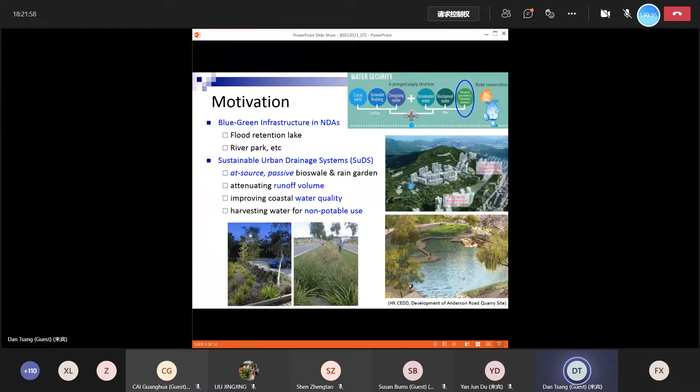At the same time, we would like to see whether we can improve the water quality. Water quality is also associated with the sustainable development goals, as Professor House explained earlier, one of the SDGs being to enhance water quality and the living environment for biodiversity. So our surface water can be partially treated before it goes to the receiving water bodies.

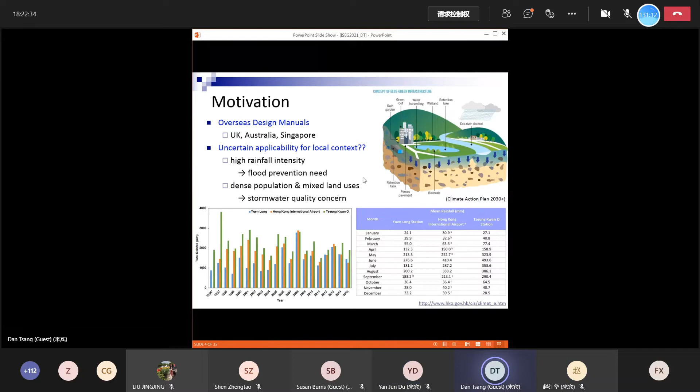So let me move forward quicker. We have some other design manuals from the UK, Australia, and Singapore, for example, and we make good use of those.

Let's go to the field scale studies we worked on with the government. For this, we're working with the DSD. In the previous project, for the new town development, we worked with CEDD, the Civil Engineering and Development Department. Then for SUDS, we're working with the Drainage Services Department, DSD.

This is in Kwun Tong, where they're dealing with the river, which is an open water channel for drainage. We would like to turn it into a river park. Then, for enhancing the water quality in the upstream part, we are going to install a filter system.

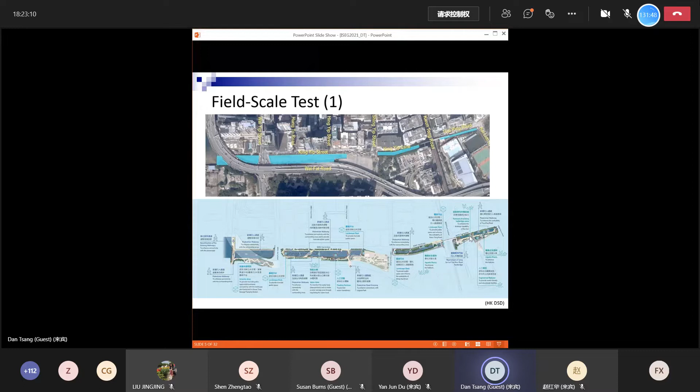Before installing the filter system, we conducted monitoring activities over a year to assess the water quality. We found that there will be some exceedance in terms of the dry season, or sometimes wet season, regarding suspended solids and so on. The red lines represent the discharge limit.

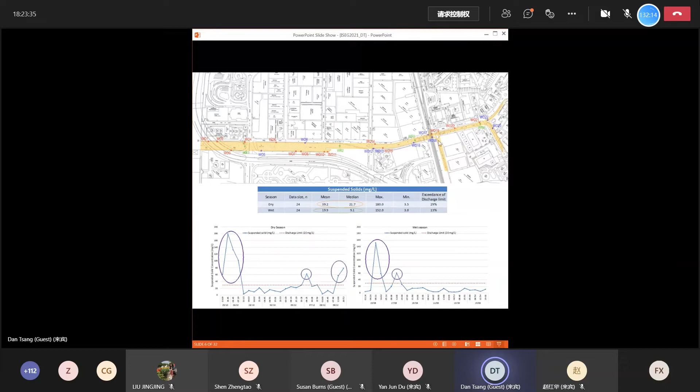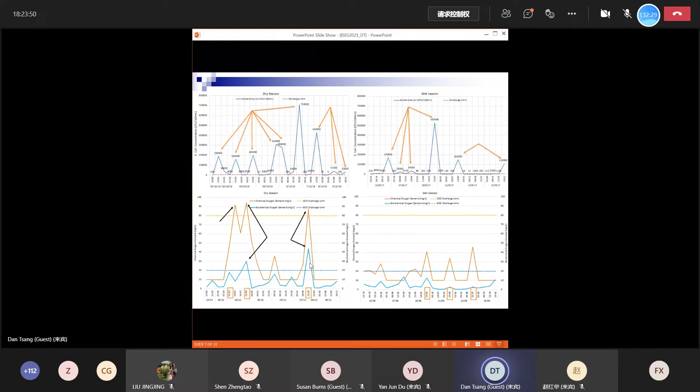Some of the days actually show exceedance in different locations along the river. In some days, especially in the dry season, you can see there will be even more exceedance in terms of E. coli, COD, and BOD, and they appear together. So the exceedances associated with water quality are more severe in the dry season compared to the wet season.

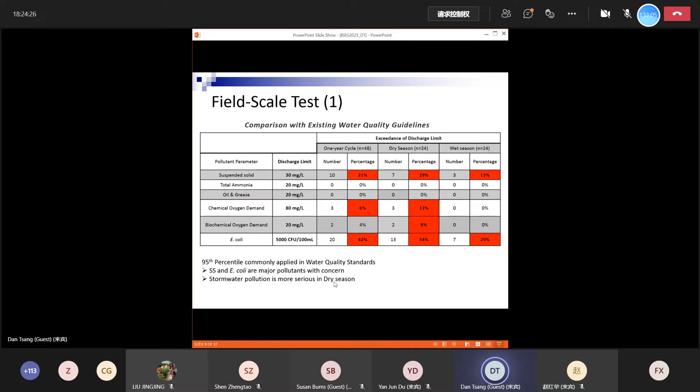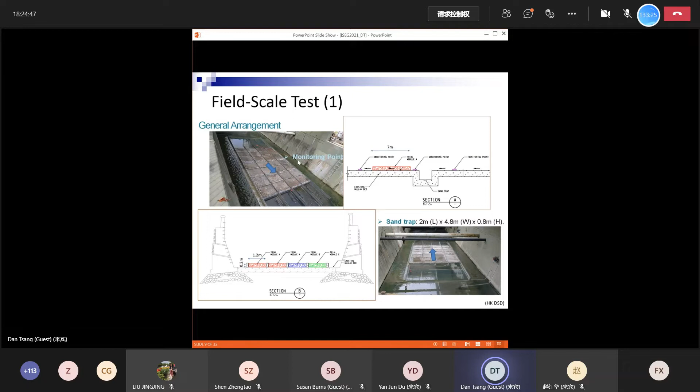Mainly, the more serious exceedances happen in the dry season. So we are dealing with the field scale test and design of the filter system, where we would install in-stream filters with different sizes of gravel, rocks, and sand to evaluate the performance for field improvement and upstream water quality.

In the first couple of stages, we worked with the wet season. Eventually, in the wet season, you can see that a lot of soil erosion runs off together with the heavy rainfall in summer. So eventually, the filters cannot keep running too long.

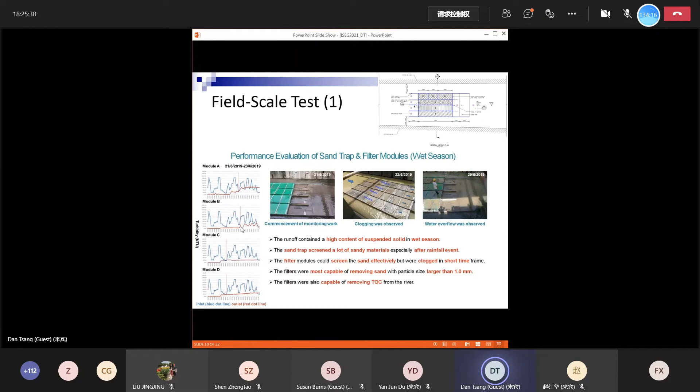So we actually focus more on the dry season application, because we see from the baseline that dry season exceedances are more serious, and dry season may also be more appropriate with fewer clogging issues, without too much flow rate or flooding.

So we revised our engineering design in view of the lessons learned from the wet season, and then operated for another couple of months - this round for 1 month, the next round for another 2 months - for monitoring.

You can see the blue line, the influent, can be effectively removed until a certain point where we may see clogging issues. The clogging is actually associated with the size of the filter - the smaller sizes A and D on the side of the filters get clogged earlier, while in the middle the largest and second largest sizes, B and C, perform more consistently and steadily.

So that would be appropriate from this second round of testing. We then proceeded with the third round after some maintenance with cleaning of the filter materials, running for another 2 months until clogging appeared.

We see that in this case, module C is actually the best compared to before. In the second round, module B, the smaller size, was best, while in the third round, module C, the larger size, was best for longer operation time.

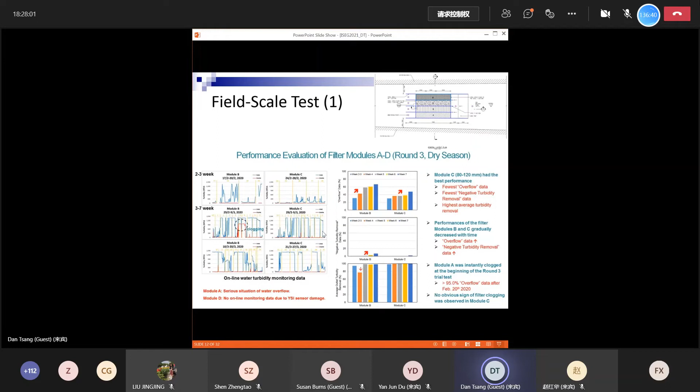So module B, the smaller size, shows clogging appearing at the beginning of the second month, while for the larger size, performance can be sustained across 2 months.

Here's a summary of the overall removal: in the second round, low turbidity scenario, we can remove 94%; in the third round, the smaller module B slightly dropped to 93%, still a very good removal. For the larger size, low turbidity gives 80% removal, while high turbidity gives 99% removal and sustains longer. So it depends on the filter design and the quality of the incoming water.

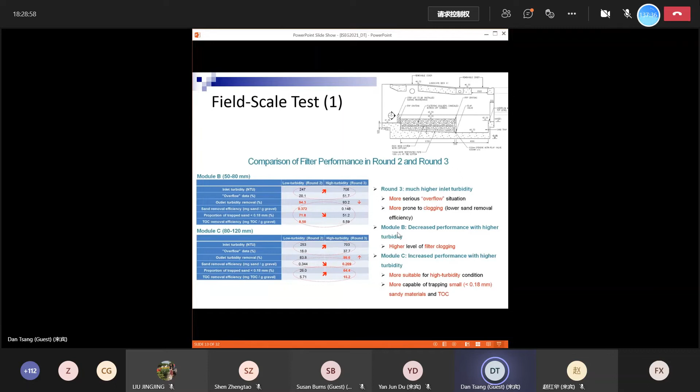We further suggest future full-scale designs with operation and maintenance, with cleaning for filters to be installed in-stream, to enhance water quality so that people can have a better river park to appreciate the natural environment in the urban setting. That's the use of the filter for river quality.

Then there's the field scale test too, which is more integrated with soil, not just a rock and sand filter but also soil media. We can apply the soil media as a vertical filter in a setting like a rain garden or bioretention cell, or if we have horizontal flow with inclination, then there will be a bioswale.

The rain garden is more like a vertical flow mainly, while the bioswale deals with flood risk, using horizontal flow with an inclination to drain water from the surface as well as vertical percolation. We have different guidelines in the States, UK, Singapore, and Australia, and we make reference to their designs.

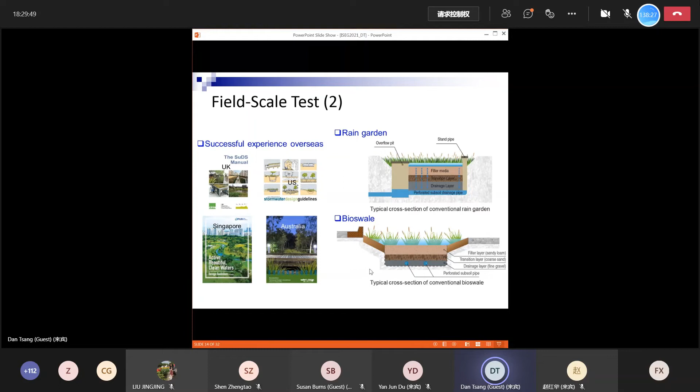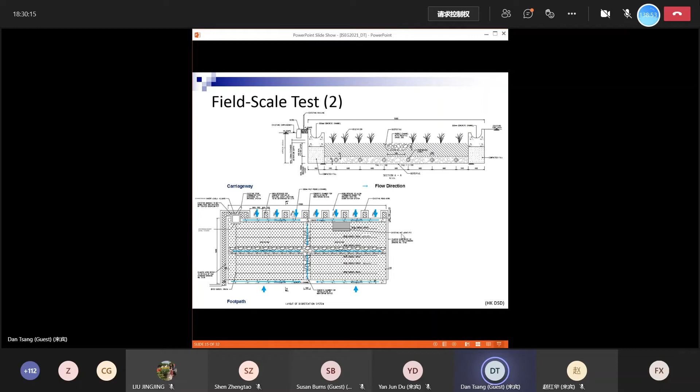Let me show you some other full scale tests which we have full evaluation results for. This is the installation of the bioswale and the bioretention cell, also known as a rain garden, which is part of the sewage treatment works in Stonecutters Island, installed and operated by the DSD.

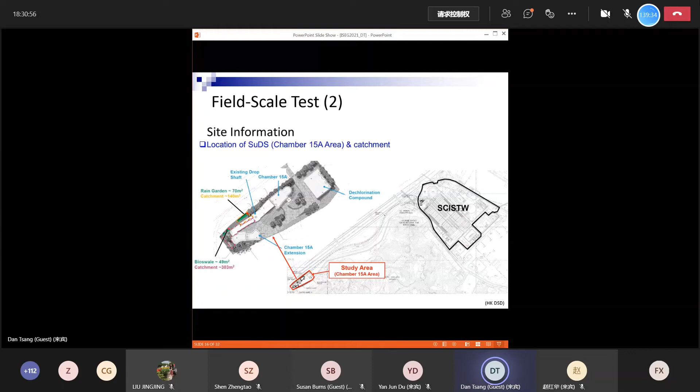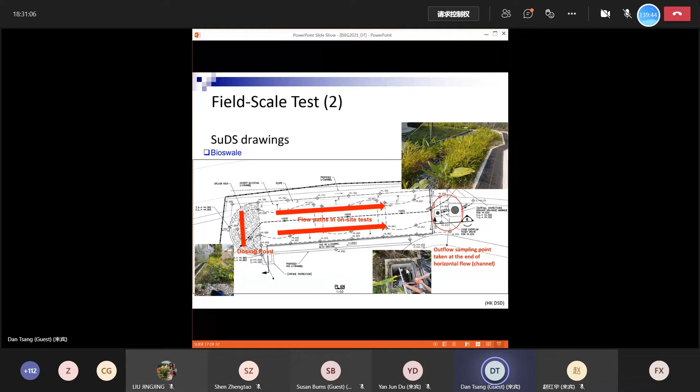We serve as a principal investigator and advisor to evaluate the performance. There's a field operation with the plant and the flow path, and the sampling point that our team works on with simulated rainfall, so that we can have better control of the water quality and flow rate to evaluate the performance scientifically. This is the bioswale and the other drainage point where we collect samples.

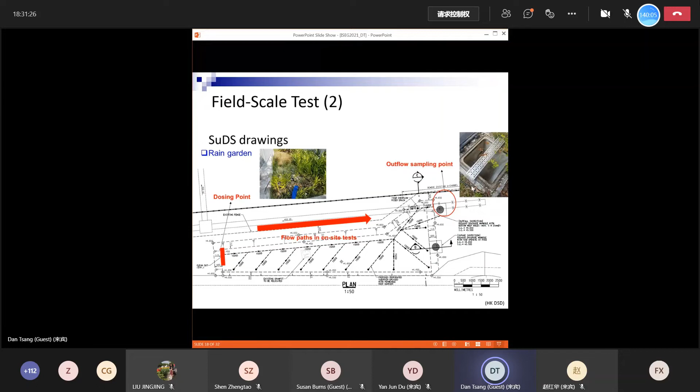These are some basic parameters with engineering design, compared to the guidelines in Singapore, for example, because Singapore is a tropical region, so that could be a good reference for us.

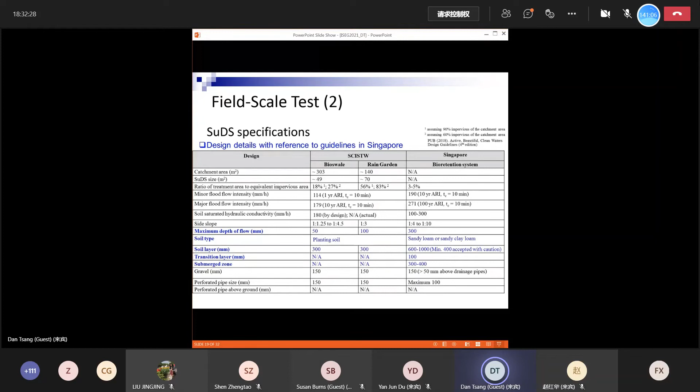Sometimes we realize that in Hong Kong, and also maybe in other densely populated areas, we have a very busy underground network of pipelines, power lines, and gas lines. So the depth of the soil filter and drainage layer may be a limitation, like in the project here with the DSD. The depth is not ideal, which compromises the performance because the soil depth cannot be as much as we want according to guidelines or lessons learned from overseas experience, due to too many power lines and pipelines underground.

Other concerns we have to recognize are that in tropical or subtropical regions we have high rainfall. Like in Hong Kong, we have very intensive rainfall in summer, while in winter we have very little rainfall. So basically all 2,400 millimeters per year is actually very concentrated between May and September, about 80%.

To deal with that intensive rainfall, our flow rates have to be a little bit quick, so the hydraulic conductivity has to be fast. But in that case, when we have high hydraulic conductivity, a problem we may encounter is plant establishment, or if it's even higher, the plant may not even be able to survive in those soil filter media, and the pollutant removal performance may be inadequate.

So we will evaluate the performance. This is exactly the part where biochar can help to retain water, retain nutrients, help plant growth, and also help pollutant removal.

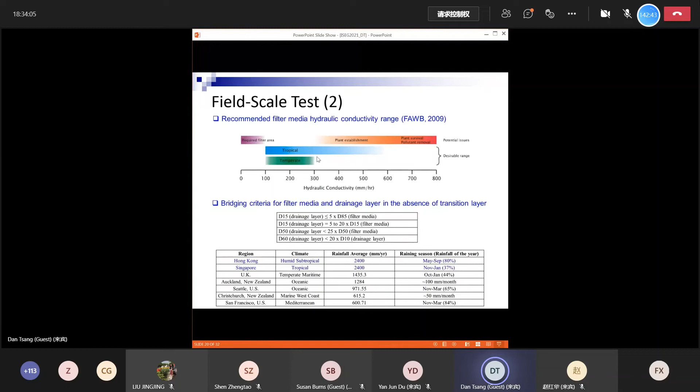On the other extreme, if you have very low permeability, that is low hydraulic conductivity, then we need a very large filter area, which may not be practical in an urban setting because we don't have enough space. So it could be a little different, because in the US, UK, Australia, they're mostly temperate climates, while in Hong Kong and Singapore, maybe Guangzhou, Shenzhen, we are more tropical or subtropical.

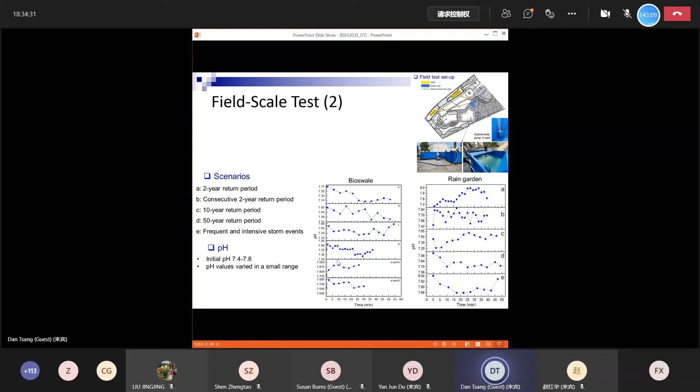These are a few tests we conducted with DSD, where we simulated 2-year, 10-year, and 50-year return periods for flooding issues and rainfall scenarios, and monitored different water quality parameters with the bioswale as well as the rain garden, where we can see the pH is more or less stable, fluctuating within a small range.

The flood attenuation can be realized, as the peak can actually be attenuated with the system, flattened out, and delayed compared to the influent end, and also the pumping rate. With the effluent end, different tests show the peak can be delayed and attenuated, and the flow can be retained temporarily, lengthening the time surface runoff takes to go through the system.

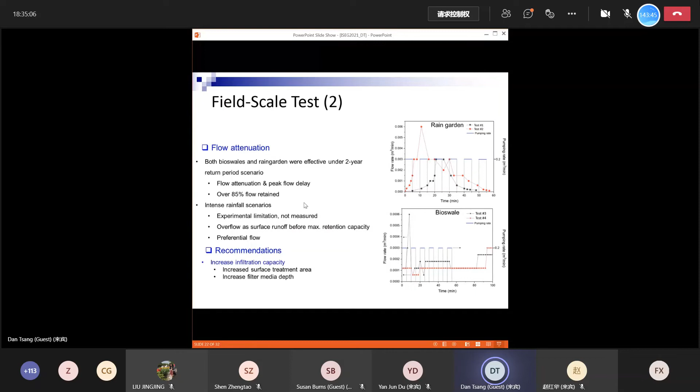Then the more pressing issue is about water quality. With the intensive rainfall and high flow rates in Hong Kong, the soil depth may not be sufficient compared to overseas guidelines.

Then the SS, in the initial stage we may have some exceedance, and also in the later stage we may have some exceedance, because maybe the capacity has been reached, causing some release of the trapped SS. Or with heavy rainfall, basically with the current depth of the soil filter, we are not able to deal with the heavy rainfall scenario, like the 50-year scenario, which is too much rainfall for the bioswale or rain garden to take on.

Bioswale performs better because you also have a horizontal flow to drain the high flow rate, while rain garden is basically vertical flow. So if you have too much flow rate, there's a lot of flooding and ponding on top of the rain garden, and eventually the performance is compromised.

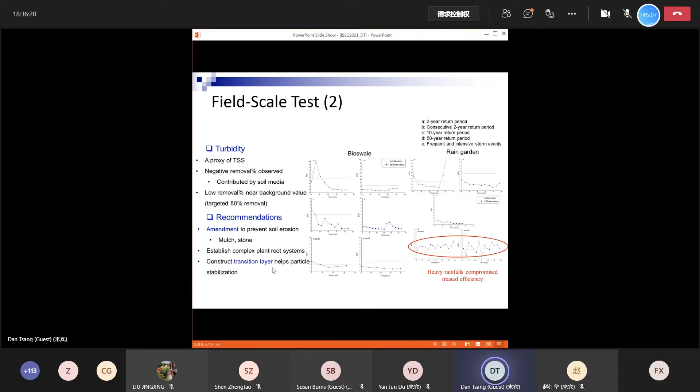So we may need to make some amendment to prevent soil erosion and to enhance the plant roots and plant establishment, and also maybe consider construction of the transition layer to stabilize the particles.

And then other than the SS, which is more like an aesthetic issue also associated with E. coli, there are the nutrients and pollutants. So we evaluate the N and P and also the metals.

For the P, because the background level according to the surface runoff quality in Hong Kong is quite clean in terms of the N and P, since we don't have too much farmland, we do not have a high background P level in our stormwater. So most of the time the removal is around 40-50% only, and we may not have significant removal in this current setup.

So we may need some amendment, like biochar, where we may tailor the production of biochar to remove phosphorus and metal together, and also other amendments like water treatment works residuals, such as alum sludge, which is basically aluminium or iron oxide, which can be very effective in immobilizing phosphorus.

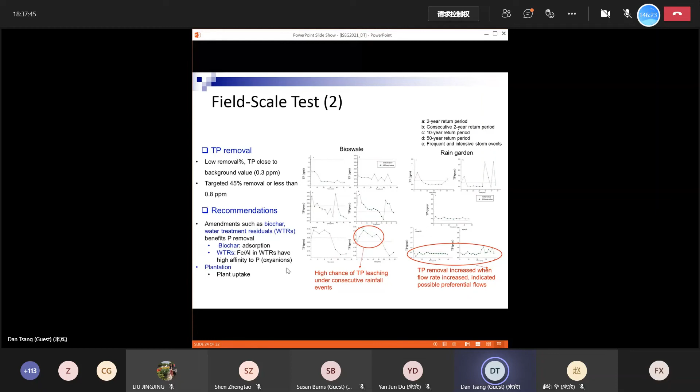For metal removal, with the rain garden, because it's only vertical percolation, under high rainfall and high flow rate the performance removal is like 70-some% to 80%, while some metals may encounter poorer removal, only 40-some% to 50%.

While bioswale can perform better, from 80-some% to 90-some% removal, though for certain metals like copper it may still have compromised efficiency, like only 40, 50, 60, or 70% removal over a period.

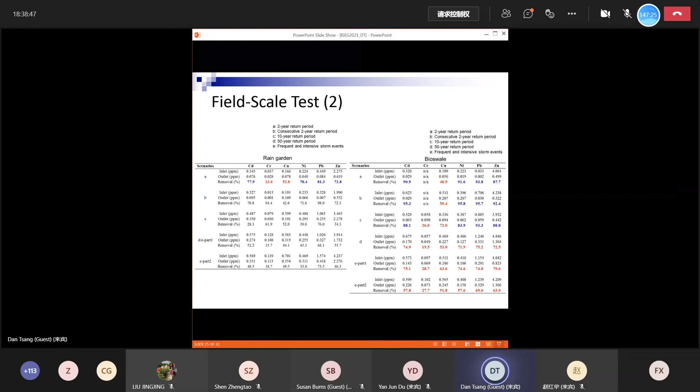So there would be room for improvement in the existing SUDS infrastructure, especially considering the limitations at the site - the subtropical climate, high rainfall intensity, and shallow soil depth of the soil filter. So there's a need to integrate biochar and other amendments to enhance the performance.

Coming back to biochar - for example, a review we worked on together with our friend Sanjay in UCLA, who I've known for 10 years or more, since we also share a common interest in stormwater and biochar. We produced a review a couple of years ago to illustrate our thoughts and the potential of biochar on the ground.

Regarding the properties of biochar, I believe many of you may already be aware, so I'm not going to explain too much on that. However, there is good potential for biochar to be integrated into SUDS, or LID in the US, which is usually termed low impact development.

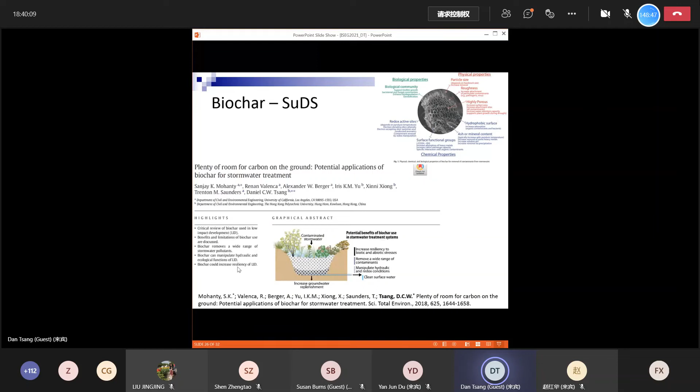Biochar can remove a wide range of pollutants in stormwater, especially organics, which are largely effectively removed by biochar. We can also mitigate flooding and water retention concerns, and enhance crop growth, which is a significant factor for enhancing the resilience of SUDS or LID infrastructure.

When we apply biochar into soil, we know it's very effective, but how effective it is - we would like to highlight the importance of evaluating performance across different aspects, including the chemical aspect, the physical properties, and the biological aspect, making a critical review on the relevance and potential of different parameters.

Like the physical parameters - water retention is one, and hydraulic conductivity and aggregate stability, which are very important in SUDS and for biochar amendment of the soil filter, to enhance plant growth and also to retain soil integrity - the aggregate structure - against erosion, weathering, and surface runoff.

Besides the chemical properties regarding pollutant removal and organic matter retention, physical properties are also important. It's a full integration, because we want to enhance the plant system and the microbial environment as well - the rhizosphere, the plant environment, and the microbial and fungal diversity in the environment are also important.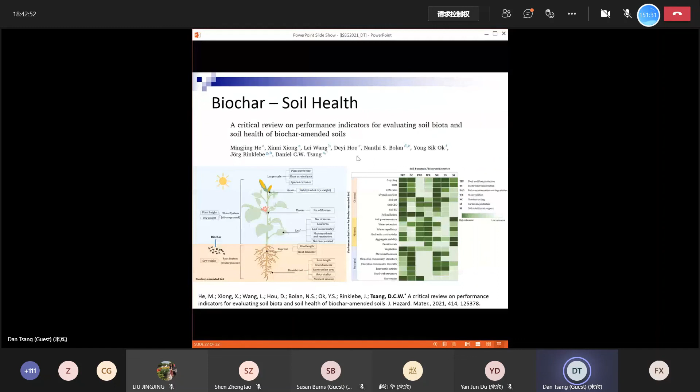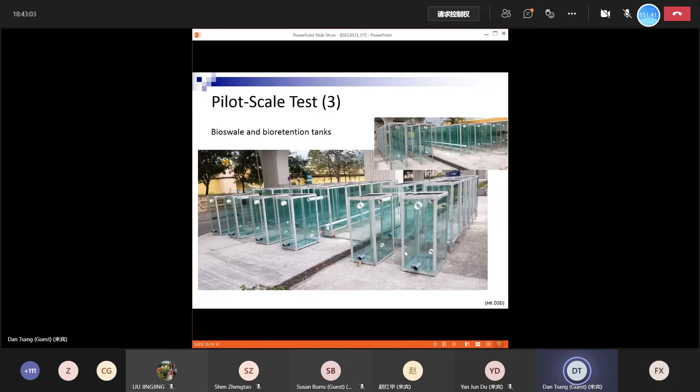This one is the review, that is this year, which I talked about, and then this is the field test, the pilot test in Sha Tin sewage treatment works, in collaboration with DSD. We installed the soil filter as we designed, implemented with food waste compost and yard waste biochar that we have locally in Hong Kong, produced at field scale, and then selected live species of plants to grow on the bioswale and rain garden. So this is an unamended control, and this is biochar and biochar amended.

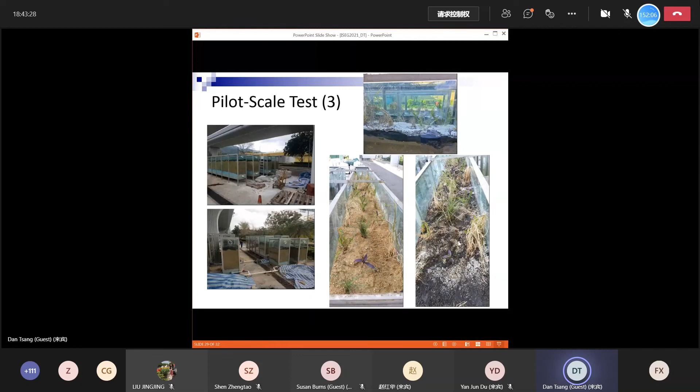And with the test, we have simulated rainfall with the surface runoff quality reported in Hong Kong, and with the biochar and compost applications, you see the plants grow very well after a couple of months.

Actually this test has been running for about 1.5 years already, and we're very pleased that our plants and settings survived a strong typhoon last summer, and also bad heavy rainstorms a couple of times last summer and this summer as well. So it seems to be very resilient, and we do not need to do any maintenance so far.

Basically we do not do anything after installation. We see that some of the tanks have better growth, like the biochar addition, and biochar addition with compost together is even better, while the control plant seems to show some stress, and the water quality and removal show the difference as well.

So we are analyzing the water quality with different metal pollutants and also different organic pollutants, including pesticides and maybe emerging contaminants as well. We are evaluating the performance, and also looking at the DOM, dissolved organic matter.

I hope that in the next couple of months we will be able to present you the latest findings from our well-controlled pilot test with the bioswale as well as the rain garden.